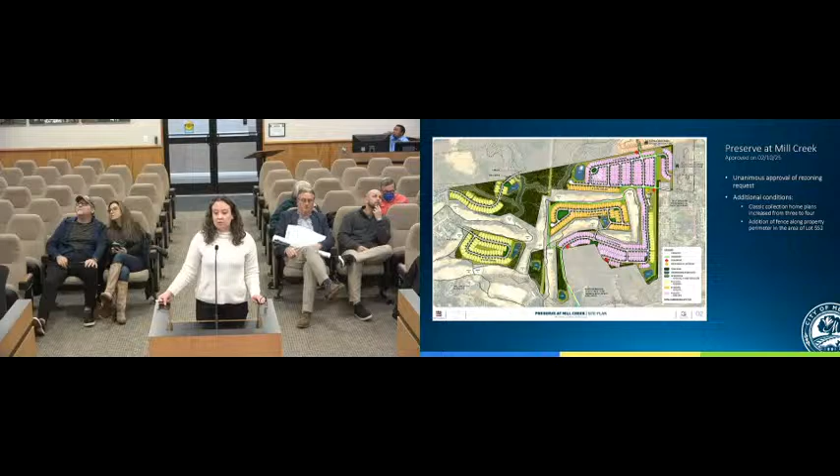Next on the agenda is the City Council Actions Update. At last Monday's meeting of the City Council, they unanimously approved the conditional rezoning request for the development known as the Preserve at Mill Creek. There were a few additional conditions considered by the council and ultimately approved, including one additional floor plan for the Classic Collection, which was a voluntary architectural commitment for the portion of the development directly connecting to the existing Mill Creek subdivision, and also the addition of a fence along the property boundary close to the roadway and lots for the adjacent property owner. Are there any questions for staff about this?

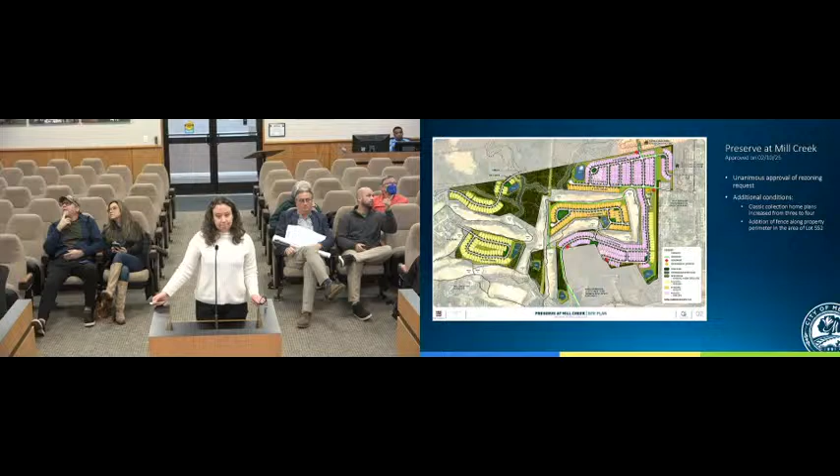Next on the agenda is a request to rezone plus or minus 58.87 acres of property located at 968 North 1st Street and plus or minus 1.23 acres of the unaddressed adjacent property on North 1st Street from R8, O&I, and R8CD to R8CD to allow for a planned unit development consisting of 192 townhomes, 36 single-family homes, and plus or minus 15,000 square feet of commercial retail space by Matt Kirkpatrick, Reliant Partners.

As mentioned, before you is a conditional rezoning request by Matt Kirkpatrick. The site totals approximately 60 acres and is along North 1st Street. It is currently zoned primarily R8, which is a residential district, O&I, which is office institutional, and then a small portion associated with the adjacent Potter's Mill development is zoned R8CD.

The request is to rezone to R8 conditional district to allow for the planned unit development referenced with the introduction to this item. It should be noted that this property and the surrounding properties are located within an overlay district, which is the general watershed area. This is the protected area of the Graham-Mebane Lake, also known as Back Creek watershed.

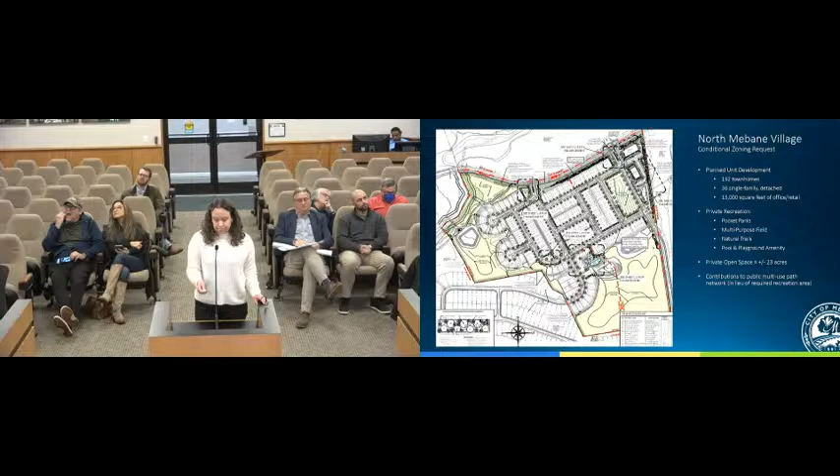There are specific conditions associated with the site-specific plan, including reduced side setbacks for the townhomes and also the single-family detached lots, a reduced perimeter setback between the non-residential section here and the adjacent property. That does include an enhanced buffer. There's also a restriction of the non-residential uses that will be allowed on that property. And then the site plan shows a 50-foot streetscape, which is wider than what would typically be required.

A traffic impact analysis was completed for this development as required by local ordinance and also the North Carolina Department of Transportation. Both the city and the NCDOT reviewed the prepared traffic impact analysis, and the developer is required to install turn lanes at the southern entrance, which is the primarily residential area, a roundabout at the northern entrance, and that construction would be in coordination with the developer of Preserve at Mill Creek that you heard last month.

And then there are also internal protected stem lengths that apply to both of those driveways along North First Street. And what that means is we don't want cars backing out into North First Street as they're making turn movements into the development. So it prohibits driveways and parking areas within a certain number of feet of the connection to North First Street.

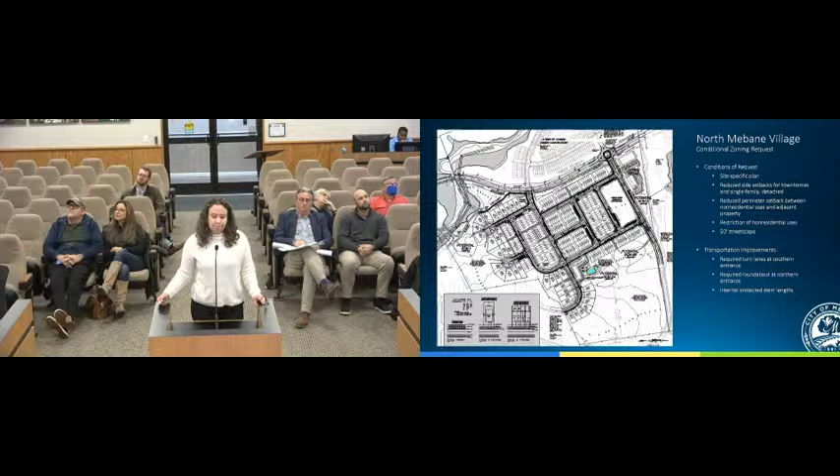Are there any questions for me at this time?

Yeah, I've got a couple questions. First, on sort of the high level site plans, there's this needle-shaped salient to the south, which I gather is the creek. It doesn't appear on any of the plans here.

Is this part of the property or what's going on with that area? So staff has reviewed a recombination plat for a portion of the adjacent Potter's Mill. That's the approximately 1.23 acres that's mentioned in the agenda item description. It is primarily because the property is in the watershed. There are built upon area restrictions, so the ability to increase the acreage of a development allows for additional built upon area. There would be no real development or change in what was proposed with Potter's Mill or this one. It would be area left undisturbed outside of the pedestrian bridge for multi-use path network.

So just so I'm clear, that part that's the stream, it was originally part of Potter's Mill. It either has been or is contemplating being transferred to this parcel, and the purpose of the transfer is to increase the overall acreage of the parcel, which then factors into a formula for how much they can use. Is that right? Yes, as a development within the protected watershed, they're limited to 30% built upon area for the whole site. Outside of, well, there's a little more complication with the non-residential component, but for the residential, it's 30%.

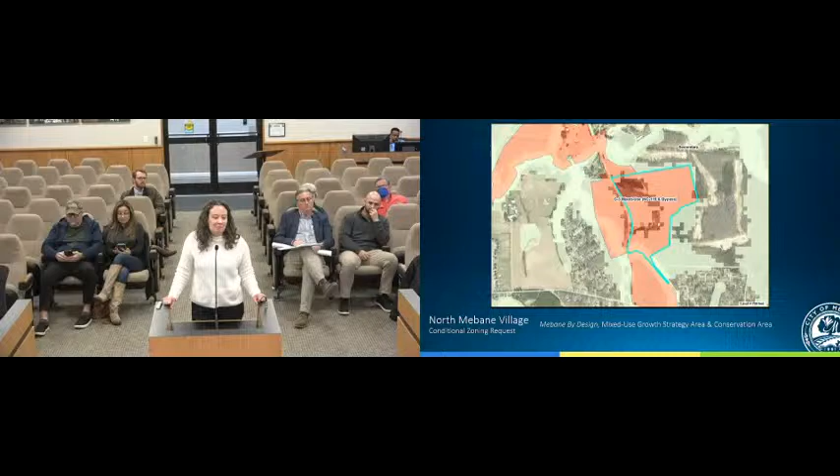I'm unaware of any immediate history. I've had a proposal for North Mebane Village in front of me within the first 6 months of me beginning here 5 years ago. So that's as far back as I go with the history of the zoning.

Are there any other questions? Okay, well, I will turn it over to the applicant.

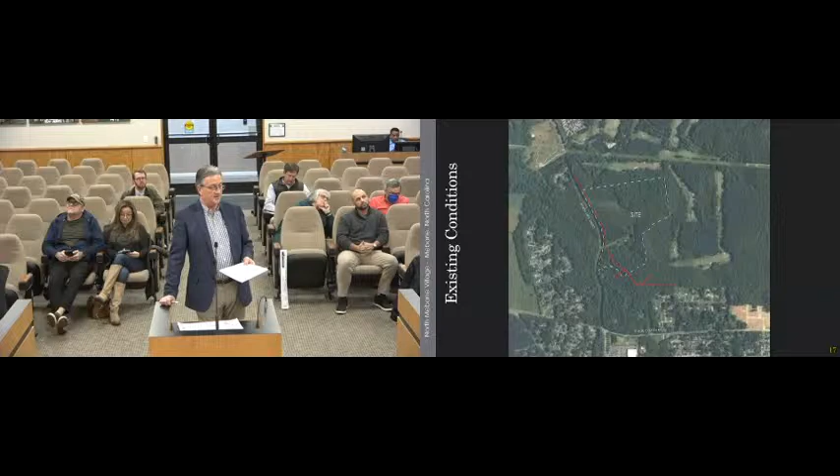The things we are providing above the UDO are a restricted list of uses for the non-residential, so you can't just put anything in there. There are restrictions on uses, things we would not want to go in there that would typically be allowed in a B2 zoning.

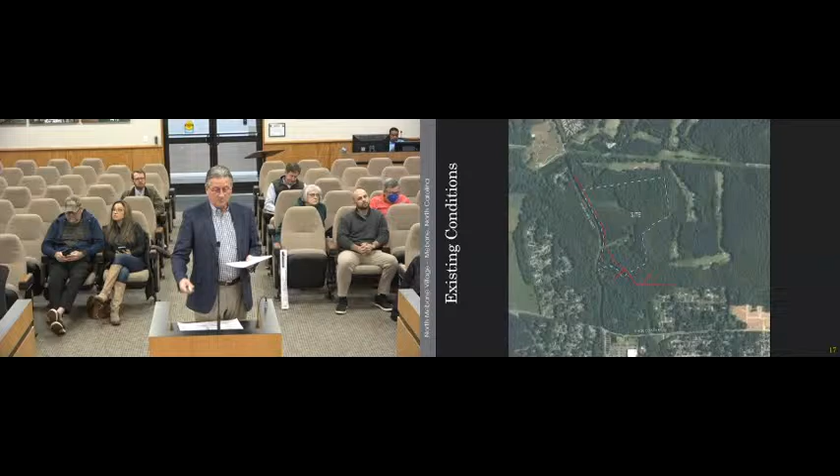We've got street trees, which I think is a real plus. I think we need to work on getting them in the street as street trees and then yard trees too, but that's for further discussion. Ashley mentioned that the buffer along 119 is increased to 50 feet from 30. We're trying to save some existing significant vegetation along the road, so it's not just a planted buffer. We've got some existing trees that separate those units there. We've also got mulch trails.

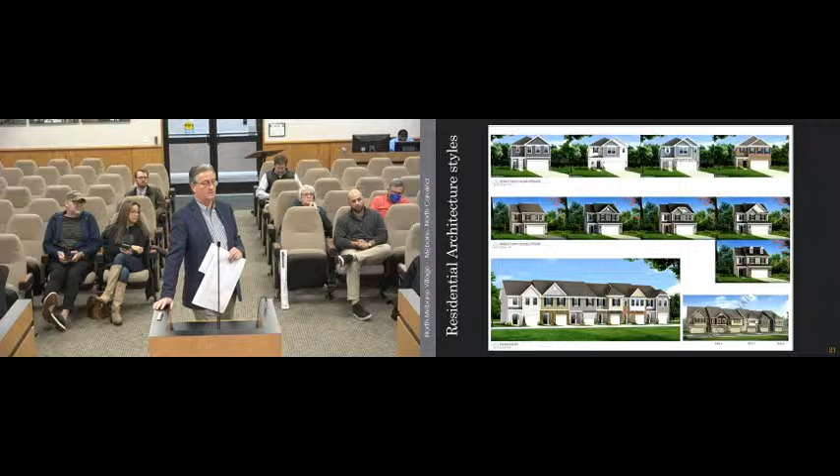Are you doing 2 or 3 bedroom units? I believe the townhomes are 2 bedroom. Please state your name and address for the record. Jackson McConnell, I'm with DRB Group, 1101 Slater Road, also in Durham.

The townhome units are 2 bedroom units, both upstairs, as well as our single family unit, which is a 30-foot product, a smaller type. One exciting thing is offering a 20-foot wide townhome as well as a 26-foot wide end unit, giving variety in the townhomes, which is nice to have 2 different product lines in a townhome building. It breaks up the monotony of having a single building looking the same. We also articulate our buildings 1 to 2 feet front and back for variety, and break them vertically as well, 1 to 2 feet, so you don't have a single mass roof line, which helps it look nice. I'm excited this community has 3 different product types for a variety of different buyers coming into the area.

All of the townhomes have a 1-car garage. The interior units, the 20-foot, are a 1-car garage. The exterior units on the end are a 2-car garage.

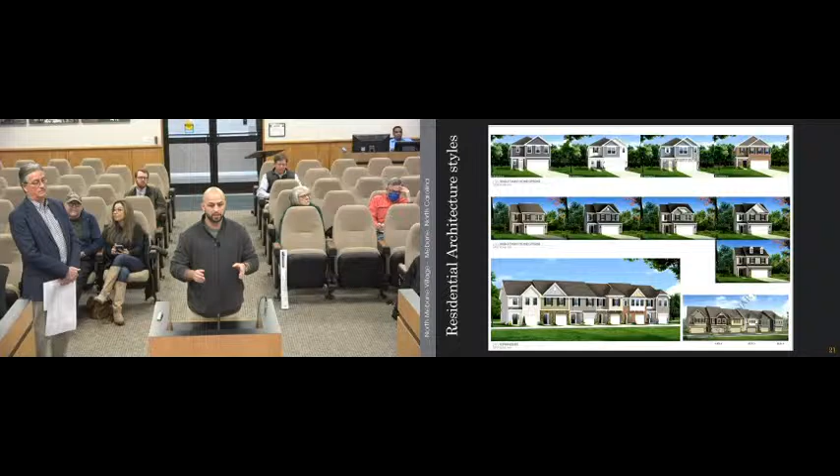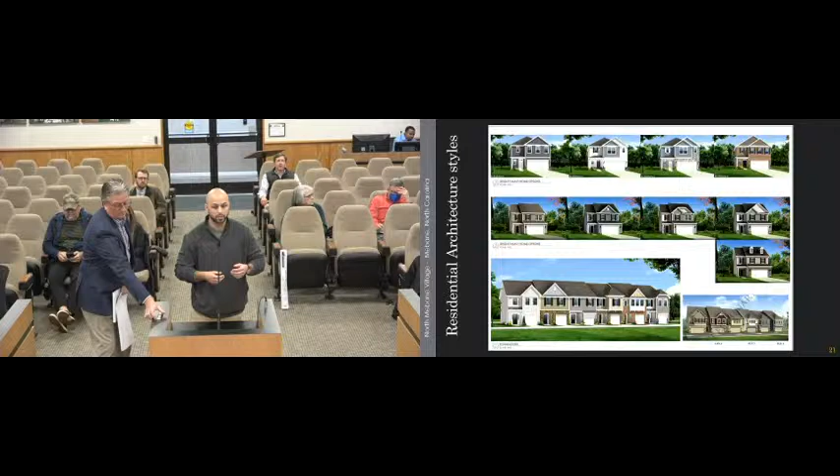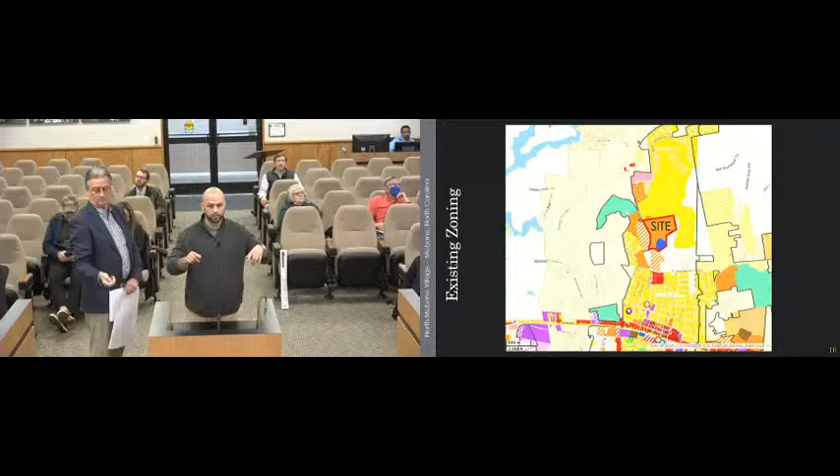Since we have some units that are single-car garage, we wanted to make sure we also had additional parking in the neighborhood to accommodate guest parking. If you look at the plan, we do have an abundance of parking, one at our clubhouse, but we also provided some on-street parking in different locations to try and capture that. One along the big lawn space on the north, you'll see parking all along the outside of that for easier access for residents or anyone who'd like to use that space, as well as at the clubhouse and some additional places that are a little hard to point out at this scale.

But you didn't have any parking pads within the units themselves. Some townhome developments have parking pads for additional parking, located between the buildings. You don't do that here, correct? You're talking about like a 2-car driveway, an additional pad to the left or right of the unit? No, not here. It could be across from it, not attached to any unit, but that takes more land. Yeah, it takes more impervious area, so that isn't planned. We're pretty constricted by the 30% rule, so finding any additional space for that, like additional parking pads, is not available.

And all of your single family are 2-story, bedrooms upstairs, correct? Yes, sir, I believe so. They appear to be. Yes.

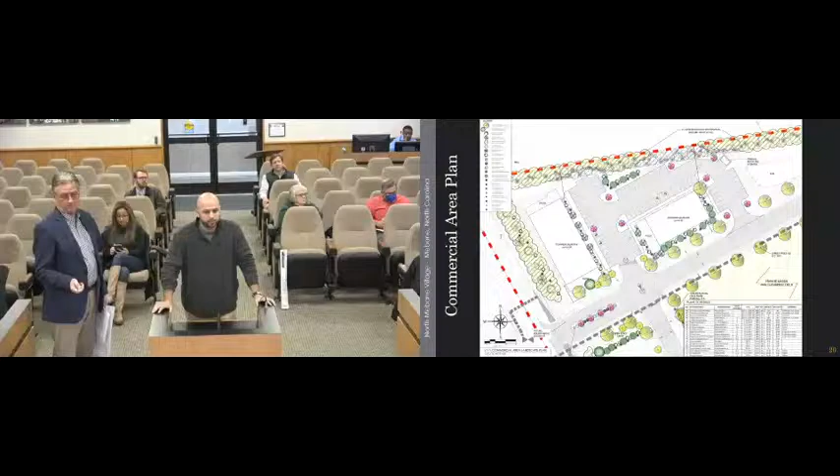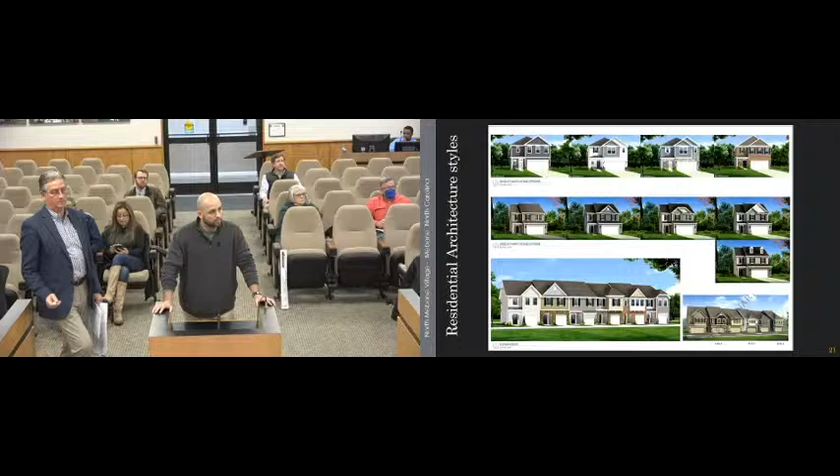Okay, I had a couple questions. First, I think there's a lot to like here, a lot of good density principles that I'm seeing. One thing I want to call out for the community, anybody watching: do you know the term stroads? A stroad is a concept in urban design, a road that doesn't know if it wants to be a road or a street. A road is something where you're trying to get cars from one place to another, and a street is something where people live, typically slower, where you can walk. One of the big problems in subdivision and suburb design is you get a lot of stroads, trying to have people living on it fairly densely, walking, doing life activities, but also passing cars through at 35 miles an hour. It's very hard to do that. I like the way you've separated those two uses, roads and streets, and except for that one stretch there, they don't mix. I think that's going to be really great for the quality of life in the development.

I had a couple of questions, kind of alluded to on the site plan. You've got your stormwater containment ponds listed as potential. Can you explain that? The potential doesn't necessarily mean they will be built there, it's just the sizing has yet to be determined. So as we go into CDs and have full grading plans and everything, those will be finalized and set exactly as it should be.

So these are the locations, definitely three, like four I guess. Four if you include the commercial space to the north. Yeah, okay, so there's definitely four of them. They just may not be exactly that square footage that you've got here. Yes, sir. Okay.

The setback waivers you're requesting, you explained the reason for doing it in the attachment, which I thought was a good idea. You're requesting 6-foot setbacks on the detached. Looking at the detached lots, there's a pretty wide range of actual lot sizes. You've got a row of 6 here that are sort of the minimum size, and everybody else is slightly larger. Can you talk about how prevalent that minimum setback would actually be for those detached houses?

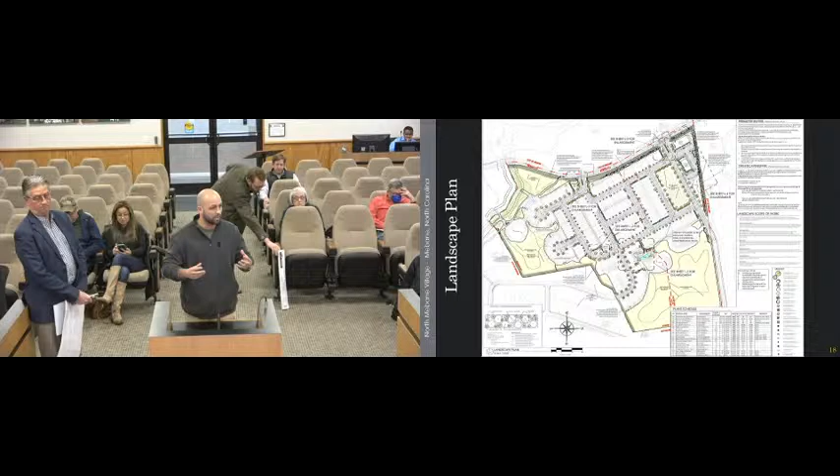The reason for the variation is again tied to the impervious area restriction. Making lots wider increases the length of road, which increases the amount of impervious area on the site. We also wanted to make sure, kind of talking about clustering, that we keep similar uses in a similar location—so your single families together, your townhomes together. To keep things consistent when you're going down a street, you want to see single families grouped. That's what led to the restriction in that area. So that was kind of the thinking behind it.

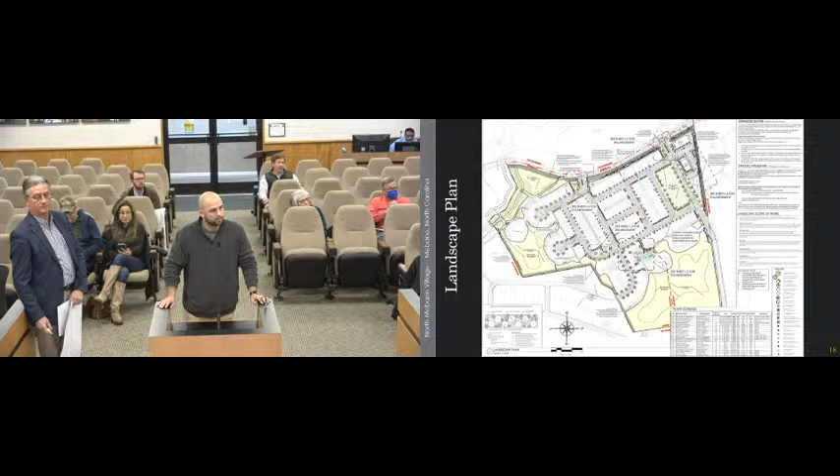Okay, my last question is regarding the First Street roundabout. I saw your note on the site plan, which I'll read for the benefit of anyone here: a development agreement is being prepared between the developers—which I assume means you—and the developers of the Preserve at Mill Creek, that will clearly articulate who will be installing the roundabout. At this time, the agreement has not been finalized. I recognize you guys are in an unlucky position, being last in line before this has to get built, and you're right here at the roundabout.

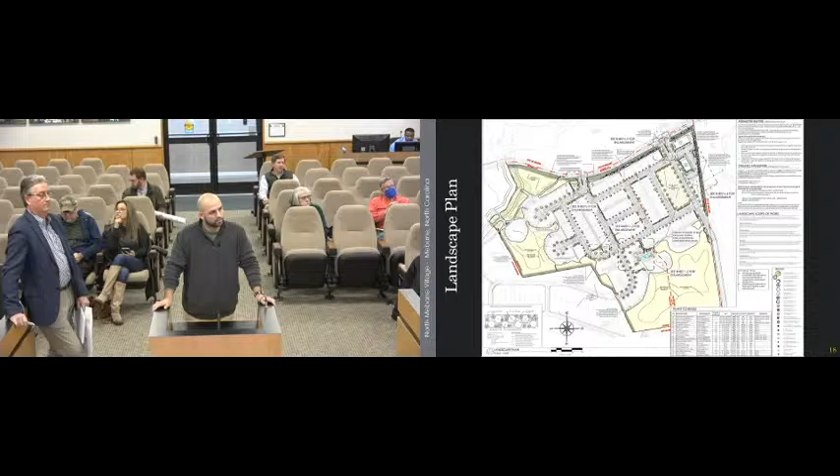What I don't want is for you guys to end up in a situation of hot potato, where everybody says 'I thought it was their job, I thought it was their job.' What kind of assurances can you give the city that, by hook or by crook, this roundabout is going to be constructed? That's a good point.

The developer agreement in question is one with Lennar, who is doing the Preserve at Mill Creek. We're working through figuring out the language for that shared cost of how the road's going to be done. I know they went through council approval, I want to say 2 weeks ago, maybe last week, I'm not sure the exact day. I believe the restriction they have is their 101st CO before that road has to be completed—I only know that because I watched the meeting before I came here. So that's the agreement there.

I see this as something similar—an assurance could be made that once we get bids on exactly how that road is going to be constructed and how much it's going to cost, the money from both developers could go into an escrow account to handle those funds. That's something that still needs to be settled through the developer agreement with them.

I'll say our development is phased at the moment, so we don't have the need for that road as soon as how that's turning out. That red phase line he's trying to outline on the smaller screen—you might be able to see it vaguely, it's a little difficult to see—but the southern half of the development follows the sewer, which comes from the south.

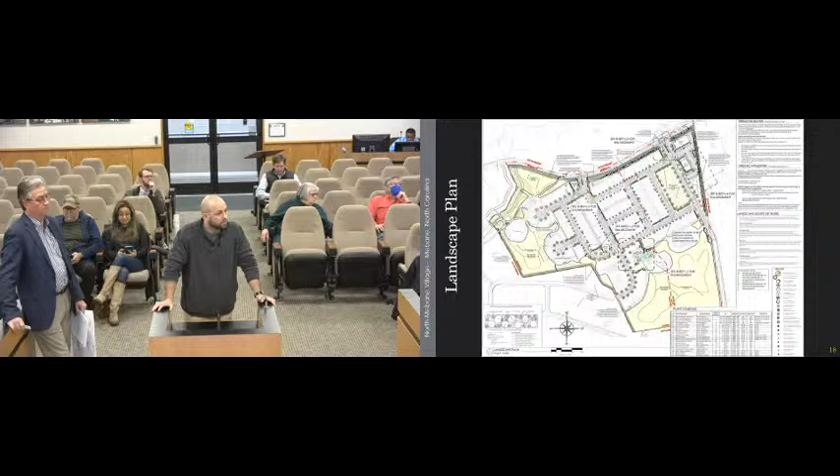Yeah, I understand everybody's trying to do the right thing. I'm trying to figure out how the city can minimize its downside risk, because your phase one doesn't require it, and neither does Preserve at Mill Creek. They're all going to start by coming in through 9th Street, if I recall correctly, and these build-outs are going to take years. My concern is we'll get three, five years out, and everybody's going to say, weren't they going to do the roundabout? It couldn't have been us. I'm just concerned we're going to end up in that situation.

I do want to clarify the condition associated with the Preserve at Mill Creek. It's the number of lots to be platted, not COs, so that does make a difference. They're only allowed to plat 100 lots before a requirement comes into play for North First Street. So if DRB has built out that southern connection, that's great for the Preserve - they can begin platting, but before they can, they have to bond the road and the roundabout. So there is that financial guarantee we would be collecting before Preserve hits more than 100 lots platted.

She's a lot better at that than I am. He's paid to do it.

I've got a question about the open space down to the south where you've got the walking trail. Is that going to be maintained with the existing tree cover as much as you can? It would remain tree, and then the natural path would wind in and out of that natural vegetation. It would remain wooded. Talk a little about this reduced buffer along the non-residential use.

Yeah, so there's a requirement in the UDO that non-residential uses require a 150-foot setback from the perimeter line adjacent to residential. Did I say that correctly, Ashley? Yes, it is just the setback, not the landscape buffer. Okay, right.

The previous plan that was being reviewed at the time we were told was within a couple weeks of TRC approval actually had a convenience store located here, so we basically kept the same setbacks or buffers. Our buffers might be larger than theirs, but they had a convenience store here and some other commercial up here. So we kind of held on to that same scenario with the non-residential portion up here. We're asking for that same relief - 150 feet wouldn't allow any commercial in that triangle, and it looks like there's just one lot that's not part of another development at this point that's adjacent to that.

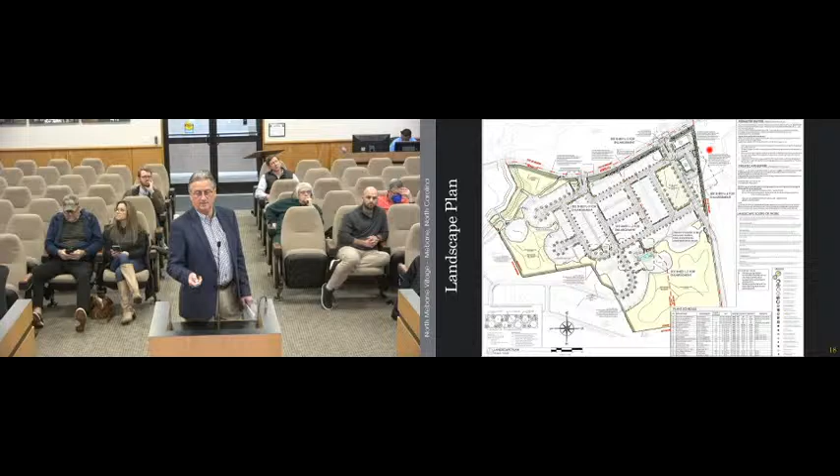There's about a 2-acre parcel right in here. I believe that's the one you're talking about. Yes, it has a little access that runs out to 119. Mr. Kirkpatrick reached out to him trying to get some commentary. I'm not sure what he plans to do with it, but it's a 2-acre, plus or minus, piece right there that you're referring to.

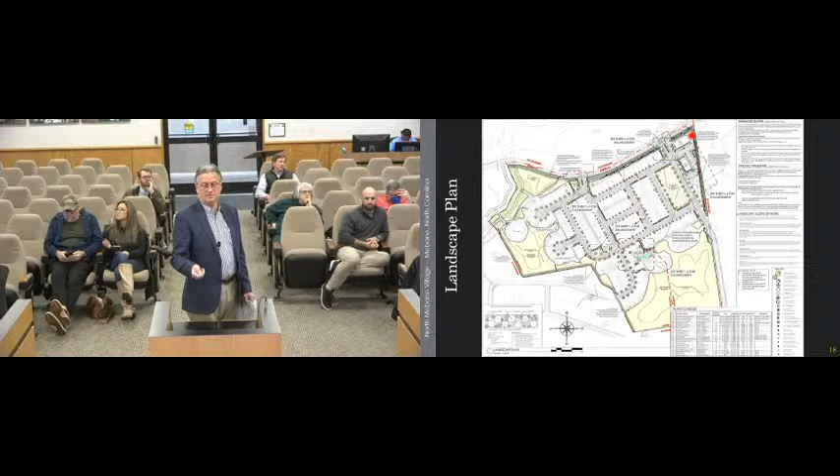We've added more evergreens in that buffer to try to mitigate that request or that setback reduction. Are you planning to add any type of fencing or just the landscape buffer? Currently just the buffer, I believe.

Any other questions from the board at this point? All right, while we are not a public hearing, we do welcome questions and comments from the public. So if anyone has anything they would like to say or questions they'd like to ask, you're welcome to come to the front.

Please state your name and address for the record. Becky Cason, 101 East Laramie Drive. My question is, is this the same developer that's developing across First Street where the park is there and everything is stubbed out, but no houses have been built? Yes, ma'am, it is the same developer. And do you have a question for him? I was just wondering what's the holdup there, and if we're not building those houses, why do we need these?

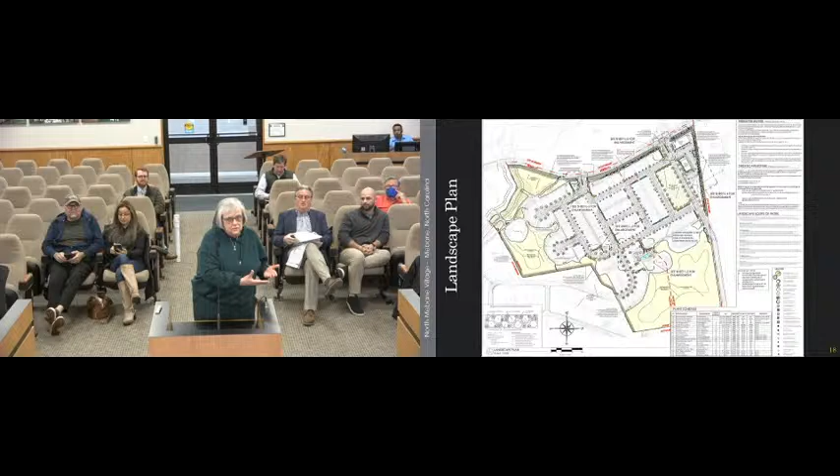I'm sure he could come up and address that question. I actually had that conversation earlier today. We're currently pursuing building permits on that property. I believe they're in review at the moment, so they're currently being reviewed by the city. Once those are approved, then we will move forward with actual construction at that location, hopefully soon, because I'd love to see those go up. Okay, thank you.

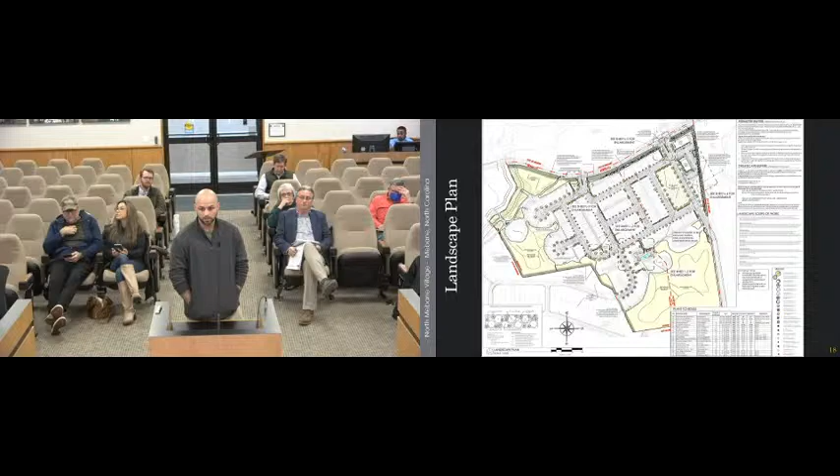Any other questions or comments?

Gary Lynn, Saddle Club Road. I like it. I've been talking about higher density for 25 years, and it's good to see we're moving that direction, and also a few amenities that you can walk to instead of having to get in your car and drive to.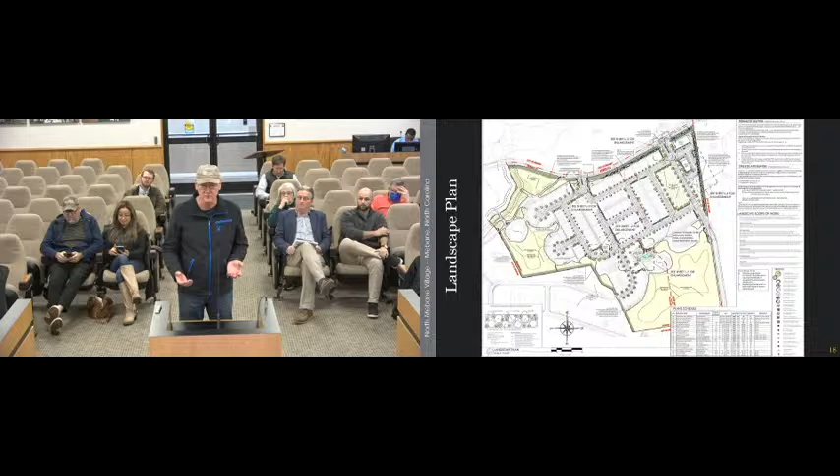So thank you. Thank you. Anyone else?

I do have one more question that might even be for staff. In the traffic impact analysis, do they do much review of pedestrian foot traffic? I know they've said that their amenities will be shared with the neighborhood, with the townhome development across the street, which gives me some concern about kids crossing that portion of 119 to get to the pool and to the other amenities. So does DOT consider foot traffic in any of their analysis?

The DOT tends to defer to the city for multimodal planning. So if you look at their review letter, there's always the same paragraph at the end. But we've had a conversation with an engineer who works for Mebane and for Graham about whether there's a way to determine a generation of the number of pedestrians. I'm not sure that there is. They were working on a different project in Graham about that. So we will have multimodal considerations included within a traffic impact analysis, but it's not necessarily considering the number of pedestrian trips that would be generated with the development.

And I know the speed limit has been lowered to 35 in that section now, but I also know that most people are not adhering to that based on my personal experience driving that section. Yeah, so maybe the roundabout, once that's in place, will help slow people down a little bit. But it's hard to go 55 through a roundabout. Yes, it is. So hopefully that will help.

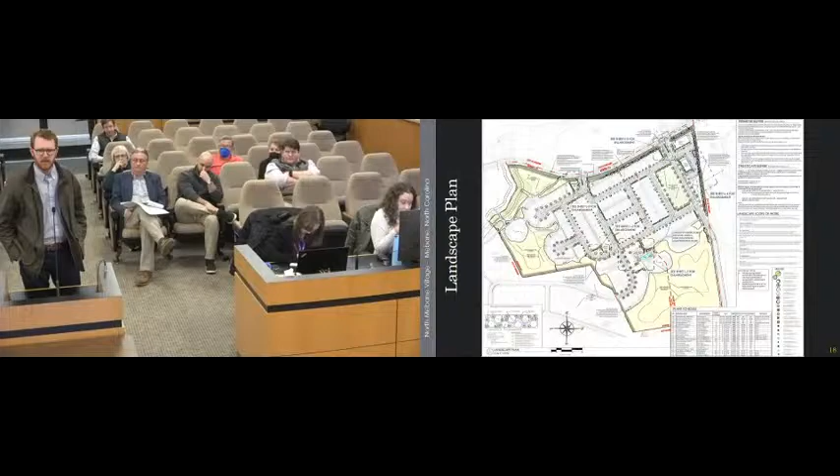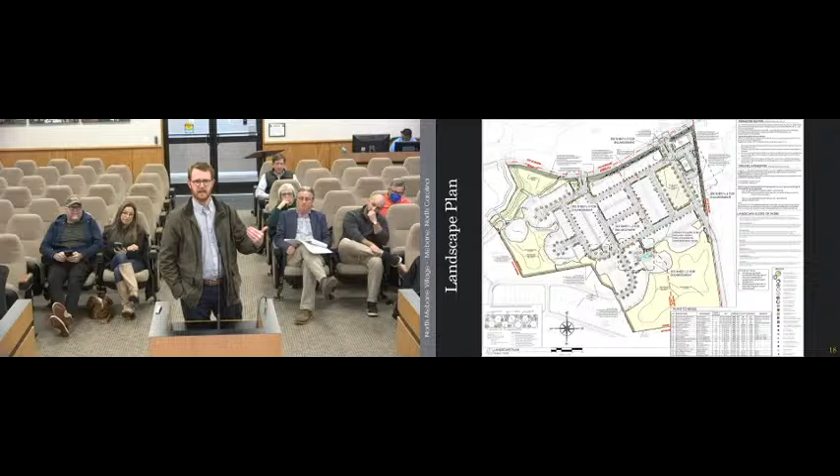Hey, good evening. My name's Andrew Stocks, 1809 Rolling Acres Drive, for the civil engineering company representing the development. There was a lot of consideration going into the project across the street and conversation about the DOT providing or approving the plans for a high visibility crosswalk associated with that roundabout. That was one of the actual requirements of the development across the street, that a high vis crosswalk be put in, which will now be connected through the roundabout with this project.

Okay, great. Thank you. Any other questions from the board, or do we have a motion?

Make a motion to approve the R8 CD zoning as presented. Motion to find that the application is consistent with the objectives and goals in the city's 2017 Comprehensive Land Development Plan, Mebane by Design. Specifically, the request is for a property within the city's G3 mixed-use growth area and proposes a planned unit development that incorporates commercial and residential uses while preserving green space, encourages a mix of uses in a walkable environment consistent with the growth management goal, provides greenway and open space connectivity between different land uses consistent with the open space and natural resource protection goal, supports parks, greenway, and open space expansion in developed and developing areas, prioritizing connectivity between each location consistent with open space and natural resource protection goal 4.3, and contributes to an emerging pedestrian and bicycle network as required by the city's bicycle and pedestrian transportation plan.

All right, we have a motion. Do we have a second? Second. All in favor? Aye. Any opposed? All right, this will be presented at the next city council meeting on March 3rd. Thank you very much.